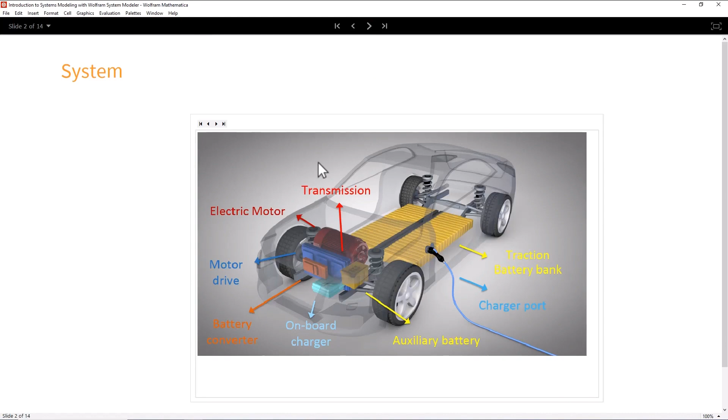Before diving into what this study group will cover, I would like to kick things off with a fundamental question. What defines a system? Please share your thoughts by participating in the poll. So we have all of the above as the winner. Robs, if you can show the results of the poll to the audience.

So the most votes goes to all of the above. Let's see what we mean by system in this study group. When we think about a system, a common example that comes to our mind is a car. Is the entire car considered a system? What about its transmission or the engine? Are those systems too? To understand this, let's define what a system is.

Here are some definitions of a system. According to NASA, a system is a combination of elements that function together to produce the capability required to meet a need. The International Council on Systems Engineering expands on this by describing a system as a construct or collection of different elements that together produce results not obtainable by the elements alone. And if you check the Cambridge Dictionary, it simplifies a system further as a set of connected things or devices that operate together.

These definitions reveal three key aspects that define a system. It is a combination of elements. Those elements interact with each other, and together they fulfill a specific need. In this study group, when we refer to a system, we will stick to these three characteristics. Let's apply this understanding and analyze some examples from our daily life.

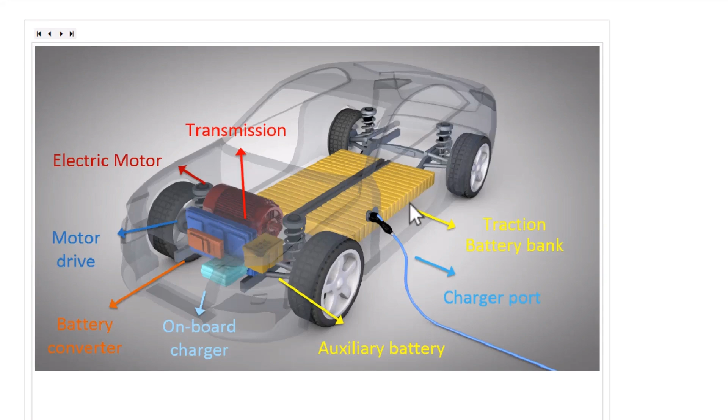But why are we interested in systems? What is its usefulness? Consider the system for your home budget. You have already identified its various elements and how they interact with each other. Now, let's say you want to buy an apartment. This decision will add a new element to your system and change the outcome of your home budget system. By creating a system, you have narrowed down the scope of your problem, and now you can easily check the impact of your decision.

But how can you check the impact? The way you can check the impact of your decision is by actually buying an apartment and checking the impact in real time. Possibly a very costly affair. What if you have to choose among 5 different apartments? Will you buy all of them? Probably not. That is where a model comes into play.

Once you have identified a system, you can abstract the system as a model, probably as a mathematical model, and play with that to check the impact of your decision. For example, buying an apartment using the home budget system. To summarize, you need to define a system to narrow the scope of your problem. You then abstract the system as a model that will help you in analyzing the impact of your decision on the system.

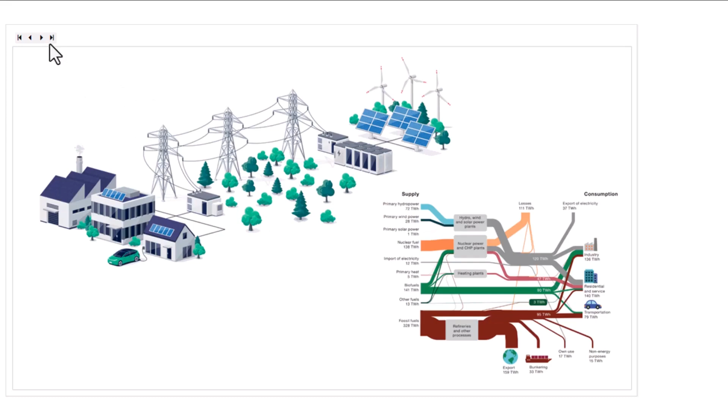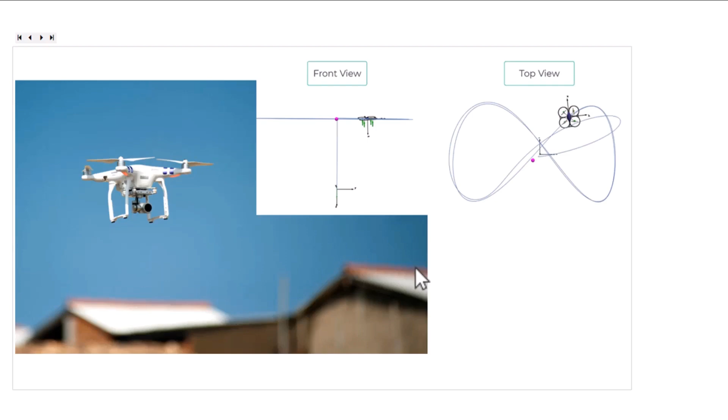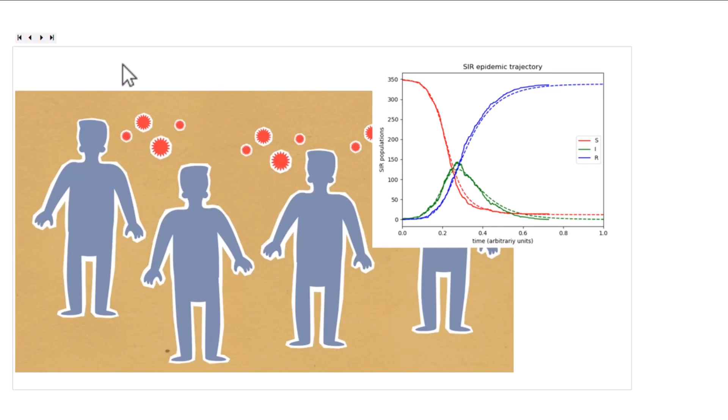So far, we have seen what a system is, some examples of systems, and why we need systems and models. Let's now look at how this study group is organized and introduce you to the course instructors.

The goal of the study group is to introduce you to thinking of real-world phenomena as systems, introduce you to the principles that will help you abstract those systems as models, and finally introduce you to workflows that will help you draw insights from your model to facilitate understanding, training, and decision making, among other things.

The entire study group is divided into two main sections. In the first section, you will become familiar with the tools. You will start with modeling with System Modeler and then analyze your models using Wolfram language. Then from Thursday, we will introduce you to the principles that help in modeling and carry out hands-on exercises.

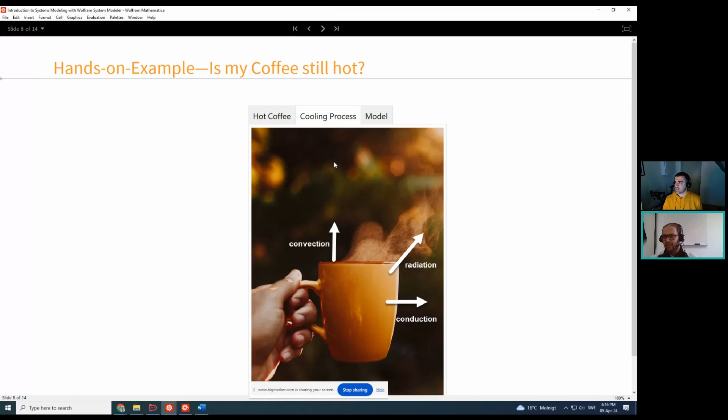In this process of cooling this coffee system, we have different components, like the coffee mug and the ambient. We will model a system that looks like this, where we have a coffee mug that interacts with the ambient, and a thermometer that is used as a sensor to measure the coffee temperature.

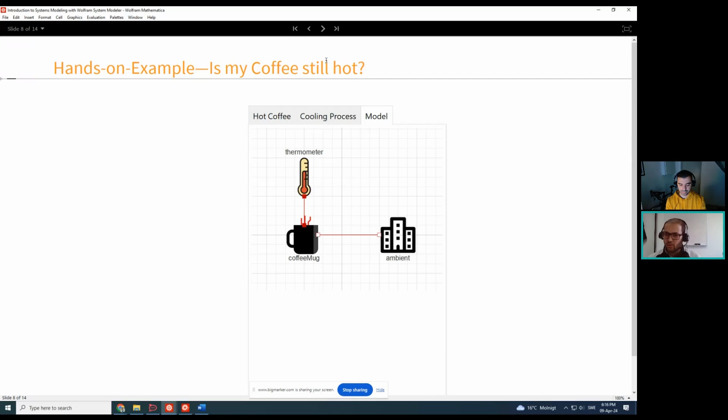Okay, so let's take a minute to open up System Modeler. Those who have already opened System Modeler can open the modeling principles.mo file that is present in the shared folder. Let me get started.

For people who are new to System Modeler, this is the modeling interface, where you have a blank white canvas where we drag and drop our components to create a model. We have different options on top, which we will cover gradually as we move along. Then you have different libraries, like the Modelica library, with pre-built components from different domains, like mechanical, thermal, or simple mathematical blocks that you can directly make use of to create your models.

But for today, we'll be using the modeling principles library that I created for this study group, and we will be using the coffee sub-package listed inside it. So the first task for this study group is to recreate this coffee cup model using the components present inside this components package.

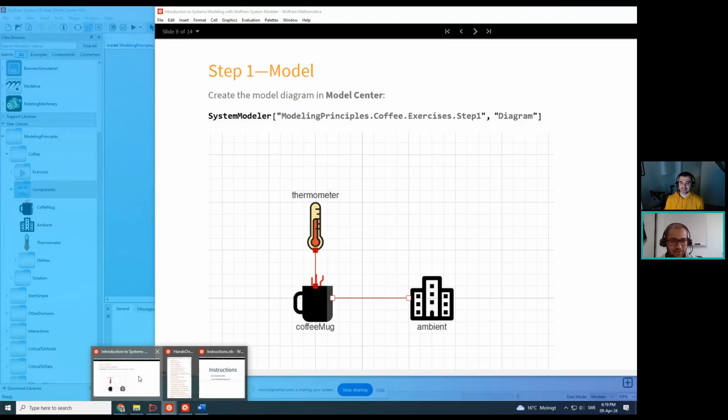Maybe you can give some hints how to start with. Just show the notebook, right? Yes, so here is the notebook. So people can just look at it and try to drag and drop the components first.

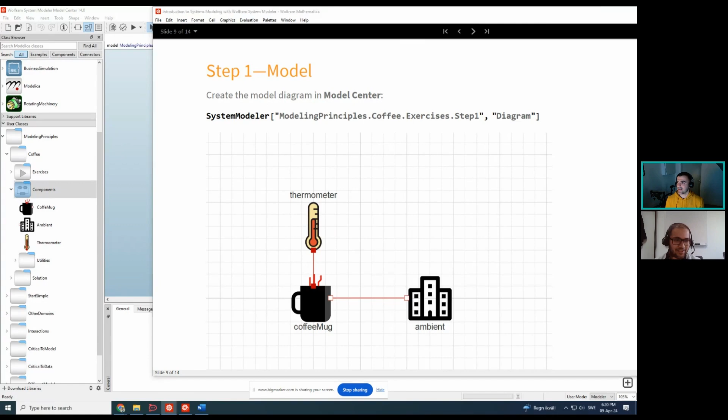We have over there in the components a red one and a white one, little squares - what are those? Such hints would be useful. Okay, so let's answer those as well. But let me start by doing the exercise myself.

Okay, so let's drag the coffee mug first. Then we will have ambient, and then we will have a thermometer here. I will just zoom in my screen so that it's visible to everyone. I think this should be fine.

So these red things are connectors. For now, just knowing that those are connectors is a good start. Those are very rich connectors - when you connect them, they take into account mass conservation laws and energy conservation laws. So they are not just input and output connectors, but they have a lot more information about the models.

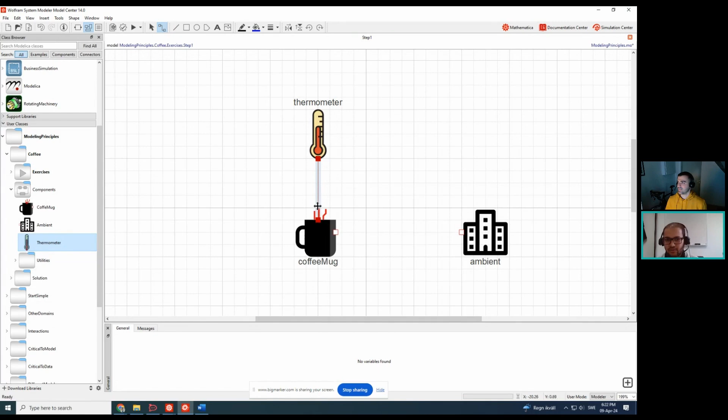That makes your modeling life much easier by taking those conservation equations into account. So now once we have all the components in place, the next task is to connect them. To connect all these components, we have a connection tool icon besides the arrow on the right-hand side. We'll click that, and now our connection line tool is activated. Now we will go to the port which expands and drag and connect it with the coffee mug, and similarly connect the coffee mug port with the ambient.

We'll give a few seconds for people to do this. The idea of this session is not to go into the thermal aspects of the different components, but for you to get yourself used to System Modeler - making yourself comfortable with how to drag in components, how to connect, and then how to simulate and process the results. Vedat, do you have anything to add to that?

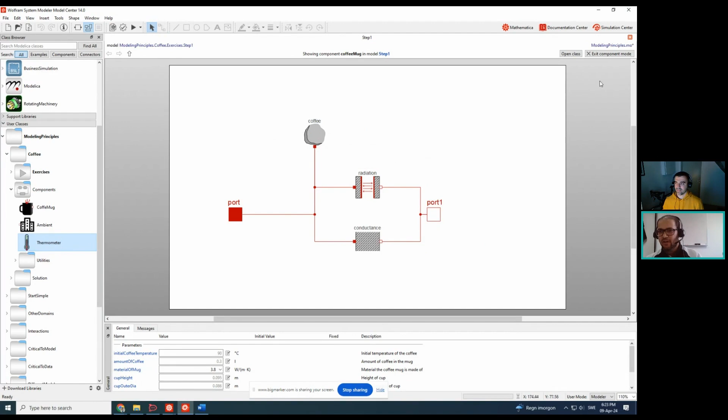So if I double click on this model, you can go deeper into how this model is built. For this model, we are just considering conduction and radiation components, and then we have a coffee storage element in it. So we are not considering the evaporative losses for now - that's not the objective for this model. But it is doable, of course. For this example, I just wanted to start with the extremely easy way of modeling these things.

Okay, so now I think people would have completed this task so far. And if someone is really interested, they can click on each of these components, and you could see that each component has a bunch of parameters that you can already set. We have provided default settings for all these parameters, and one can play around with different initial temperatures.

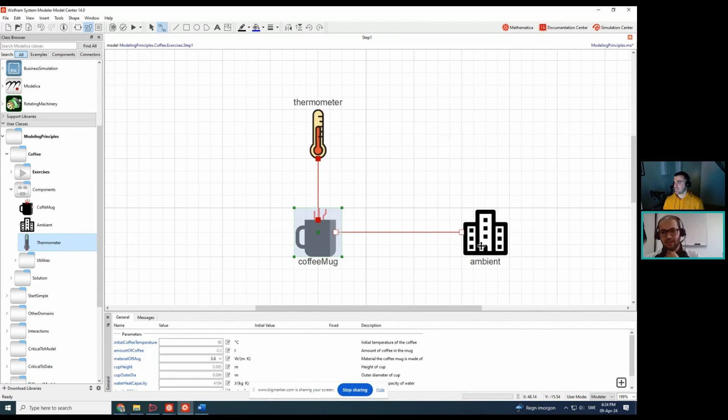And different amounts, different diameters, and all those things. Each of this, the ambient is a boring one, it only has a fixed temperature in it, but the coffee mug is the interesting model. So far we have dragged in our components, connected them together, and I showed you that you could change the parameters by clicking the components and choosing a value based on what you want to model.

And the thing is, once you start typing here, you can actually switch between different units here as well. So for instance, if I am not comfortable with the SI units, I can choose Fahrenheit as well. And then System Modeler would automatically convert to the right unit.

Okay, but so with that, what now? We have the components in place, we have connected them together. What is the next step before we start simulating it?

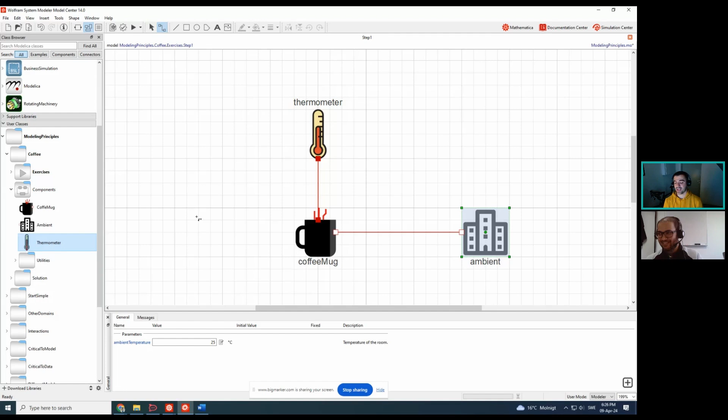When we just get started, you ask what is the system, right? So can we now explain that question? For instance, in that, I can say that if the coffee mug is the system itself, or should we include all of them?

I think for this cooling of the coffee process, we have the three things together. For me, I would consider it a system, because the coffee mug is interacting with the ambient, and we have a sensor to get an output from it. The objective of the system is to understand the cooling process of the coffee present inside it.

So I would refer to a system as the entire thing with its elements, and we simulate it because it has a purpose of understanding how the model would behave, right? All the dynamics and interactions between these components as a whole is the system.

Okay, so the next step is, once you have the model in place, once you have connected it, the next thing is you would want to set up the simulation, the experiment setup. For example, how long should the simulation be run? So you need to specify those details for your model, and you can do that by clicking this small arrow icon beside the play button and clicking the experiment setup.

Here you can set how long the simulation should run. For our case, I will choose a time unit, let's say minutes, and then I will start by choosing a stop time of 30 minutes. I will give a few seconds, like half a minute, for people to open up the experiment setup and fill in these values, or any value of their liking.

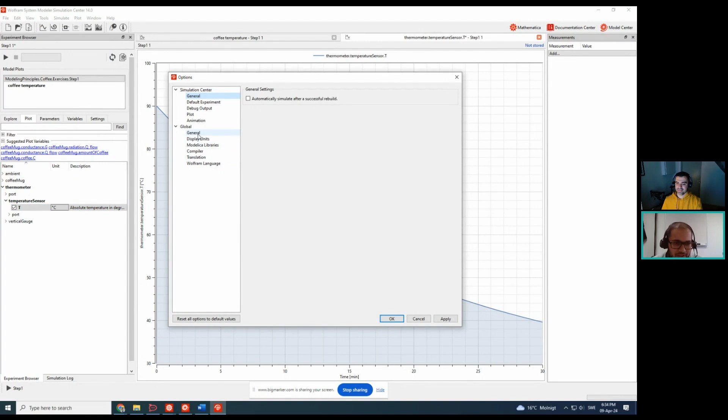We have a question about the blue filling. I have a global setting for it. Let me get back to the default setting first - go to general within the global options. I think most of you would have gotten a plot like this without filling.

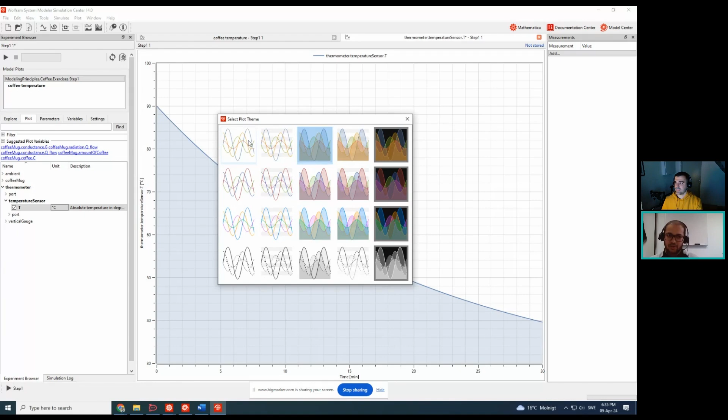If you want some filling in the plot, I find it useful, because if there's a zero crossing, it helps me easily identify it. And if I plot multiple plots, it helps segregate them. I've set this plot theme in the global properties so I don't need to define it every time, but you can play around with different themes and switch between the available ones to see which suits your model.

Okay, so now once we have the model, simulated it, and plotted the results, the next thing we should do - let me see what I wrote - once you have the simulation, we started with a random simulation time of 30 minutes, and in most cases that time is not what we want.

It's just the first guess value that we have to give, because we don't know the dynamics yet. In this case, if you want to simulate for longer, you can go to the settings, and in the stop time field you can simulate for a longer duration.

For instance, I have selected 60 in this case, and then press the simulate button here. And when you do this, you see that my temperature and time duration have changed. So once you have the plot, this is the first thing that I typically do.

The next thing you would do once you have the plot is test different scenarios. Like, what would happen if my ambient temperature is something else? Or what would happen if my initial temperature is something else? How would you test those scenarios? Should you go back to the model, change them, and simulate again? Of course, you can do that.

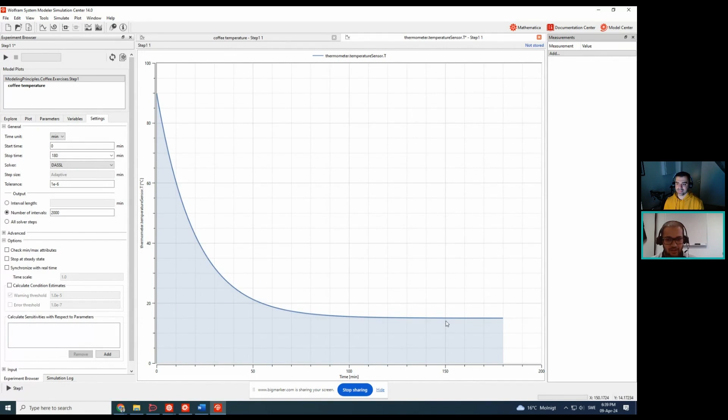Ankit, maybe we can also increase the time and show what is the steady state temperature of the coffee mug, how cold our coffee mug can get. Yeah, I think so. Let me simulate for a longer time, 180 minutes, and then you can see that I'm getting to 15 degrees.

So the steady state temperature is of course the ambient temperature, and I can get the value either by hovering over the variable, or by pressing control and clicking on the time axis, so I can get a measurement at that point in my measurement window. Here you can see the temperature after 150 minutes is 15 degrees centigrade in this case. So if you want different snapshots of time, you can control-click on the x-axis and plot those variables.

For some reason, Vedat, my coffee temperature is not changing, but I think we can look into it later on. Okay, I will have a look at it later.

Getting back to the model, so once we have the plot, we can change the parameters. We can change the initial value of the different variables, and we can change the experiment setup like the stop time and so on.

So now the next thing, Vedat, what should be the next thing? Now once we have the model, we know how to test different design scenarios. What should we do next? What will be interesting now? Good question. But I think before we discuss what we should do next, we should try to store our plot in the model.

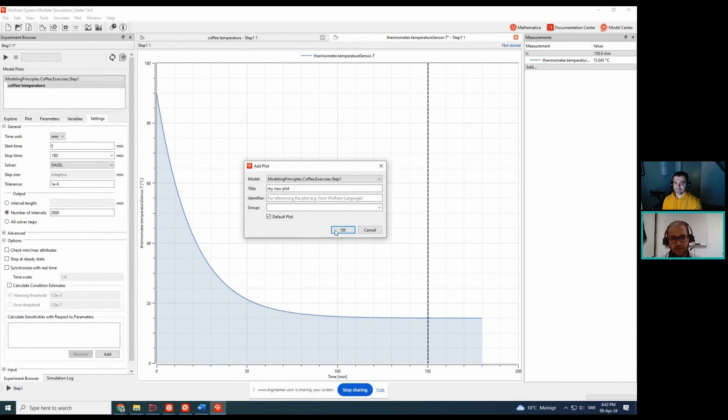And when I click that, I can give it a title, 'my new plot', and make it a default plot, then click OK. When I do that, my new plot is added to the model plots.

I think you click default plot yes, there. So yes, what was the reason for that?

Let me delete my previous plot here, just to repeat the step. You click on the 'not stored' text, and then click on 'add plot to model'. When you get the add plot to model dialog, you give it a new title, and then you can choose either to be a default plot or just list the plot here as a not-default plot.

The default plot is, let's say, when you simulate a model, which plot should be shown at the start. If you have five different plots stored in the model, all five should not be shown - it will be very confusing. So you can select which plot to show first, and then have auxiliary plots which are not the primary plot you want to see, but those plots help you in your analysis.

So once you have a model, simulated it, plotted it, we have now stored the plot. I think I should give a few seconds, or a minute or two, so people can try playing around with saving a plot, because I think saving a plot is quite often missed in the modeling process. But anyways, let's ask Sergio.

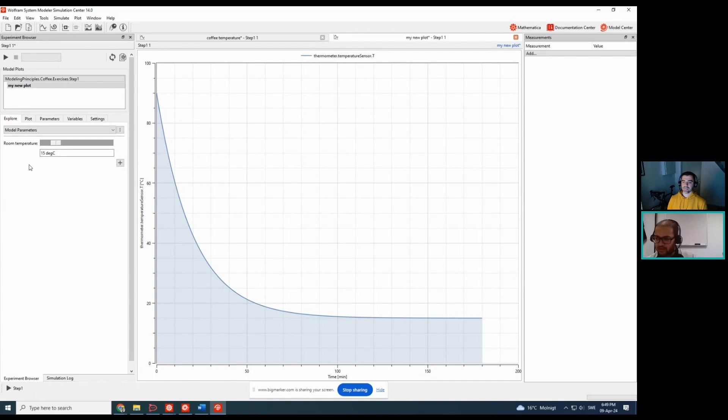Yes, Ankit, can you tell us how we can get there? So we go to the Explore tab first. And in the Explore tab, either it says create a new panel, and you click that option. For now I have a panel, that's why I'm getting this plus option here. If you start with a blank, you would have got a message saying you can create a panel by clicking somewhere in the first tab. Or if you already have this panel done, then you can add a control object by clicking the plus button here and then selecting control object.

If we don't see the Explore tab, then we can say that that version doesn't have it. I think that would be the right analysis.

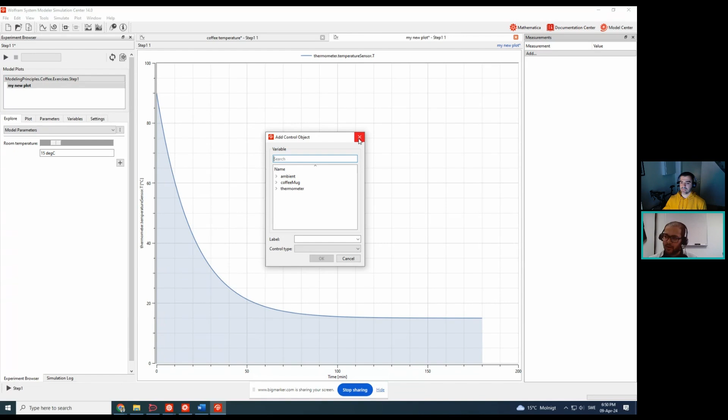I think for this study group, people can try with the new version of System Modeler, version 14, because that has a lot of new functionalities that we might cover in the study group, like dealing with units and other things. I created this model taking into account version 14. So that is my expectation, and some people might find it a bit different if they're using an older version. But yeah, this is version 14 that I'm using.

So far we have seen how to plot, we can store the plot, and then we can change the parameters, variables, or settings, and then we can add a slider to one of the parameters and quickly iterate through various designs.

Okay, now let me get back to model center. There are a lot of things that I want to cover here as well, but I will not go any further because we have 8 more sessions coming up. So if you don't understand something, it's very normal to feel overwhelmed at some stage. Just try to give yourself some time, and once we are done with the 9 sessions, I think one would really be comfortable using this.

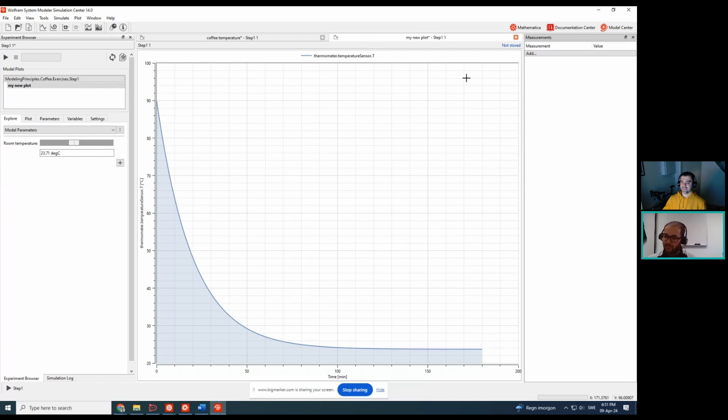We had a question here from the audience, and they were asking what is the difference between this red one and the white little squares, the connector squares.

For this model, nothing. For the thermal models, nothing. It's just different ways of visualizing it. But it doesn't matter. Here I'm connecting a red with a red, and here I'm connecting a white with a white. That doesn't mean that I can't connect this white with this red. For the thermal domain, it's just for visual representation, because sometimes you have elements with a notion of coming in, coming out, so it helps when you have a component with in and out to visualize it properly.

But since the connectors are based on equations, and those equations actually determine whether something is going in or going out, we use concepts similar to Kirchhoff's current law and Kirchhoff's voltage law to determine how the connectors are connected. So at least in this example, in the thermal domain, they don't have any difference. It will not differ.

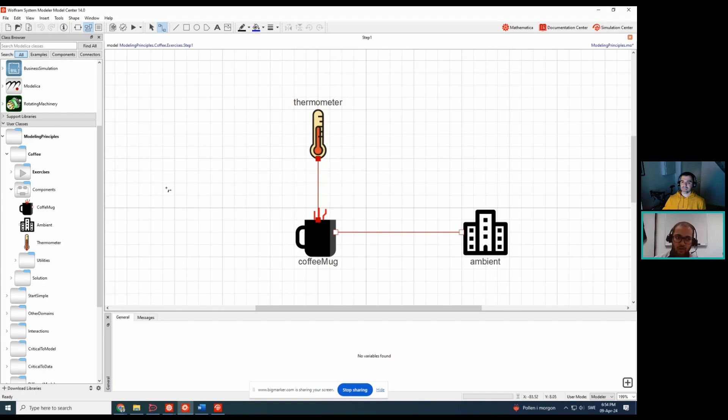Now let's add documentation to our this exercise. To add documentation, you simply right click on the model and go to view class documentation. So right click and view class documentation, and this will create the documentation of the model. I will give a couple of seconds for people to at least get to this stage. So you right click on the model, click view class documentation, and you will get this view.

In this view you can see that System Modeler automatically pre-populates your documentation with some data. Like, it lists the name of your model. In this case I didn't have a description, so it's blank, but it also shows the diagram of your model and then the different components that are used in the model. So we do try to automatically populate some of your documentation.

But now let's say you want to add the objective of your model, and how can you edit it? To edit this document, you click on this small arrow here, besides the pen option here. I will pause here for a couple of seconds so people can actually see it. You click on this small icon on the top bar, and then you will be provided with different options like edit information in what-you-see-is-what-you-get editor, or edit information in HTML.

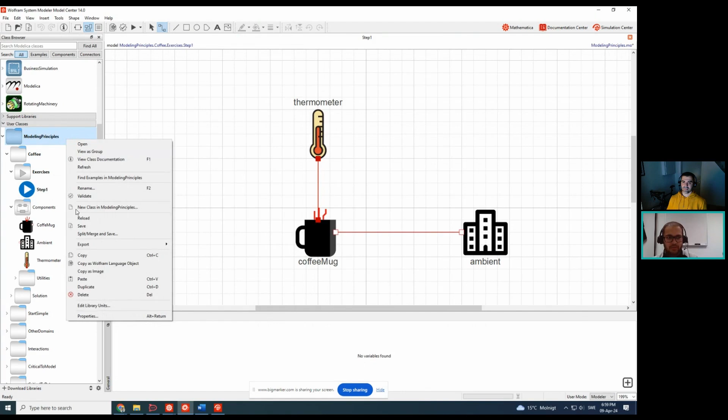So you can list all the assumptions, and then click back on the same icon, and you'll see that in the information your text is updated. We'll give a few seconds for people to try it and get used to the documentation. Once you're done, you can close and save your model. Next time you open it, you have the model plots, the control panels, and the documentation stored in the model.

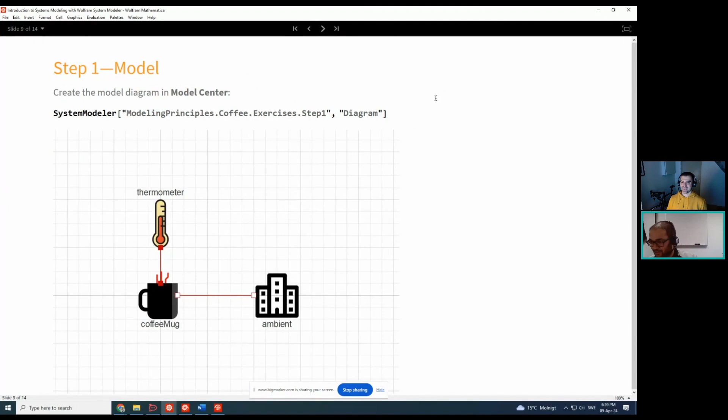Let me interrupt you there because that is related to a question we got: how does System Modeler know that we have a exponential temperature decay? We showed something like a first order degradation decay, so how do we get that dynamic? I guess it would be nice to give an overview of how those pre-built components are written, because right now it's like a magic box, we just drag and drop things and show the magic.

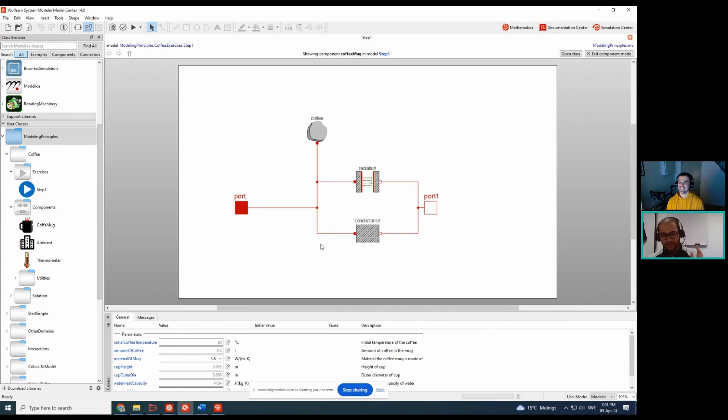But if someone is really curious and cannot control their urge, they can double click on the coffee mug, double click on the conductance, and open the class. Here on the top bar you have the text view, and in the text view you can actually read through all the equations. The thing is, this code you are seeing is not Wolfram specific code. This code is called the Modelica language, which is a different tangent I don't want to go into now.

But for people who are really curious and can't wait, all these models that we have created are made using the Modelica language, which is an open standard language for modeling these kinds of complex physical systems. These equations are simple equations that we are used to -- this equal sign is not an assignment operator, it's just an equation. So people who really want to understand how these components are built can go to the text view and look into the equations. Also, if you're eager about Modelica, you can search for it and know more.

Along the coming 8 days we will also show you eventually what this code looks like, and if you want to do more complicated models, how you can do that. But we will go slowly. So we cover all the dynamics related to that domain in those components already -- that is why we are seeing that result.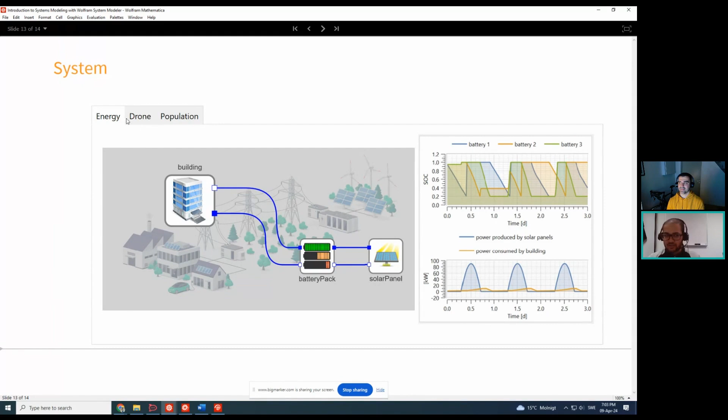Okay, anyways, let me finish it first. So you can make energy models and try to understand or test your logic, like if the battery is sufficient to power a building, for instance. Or you can use a drone model, a very comprehensive drone model, and try to understand the effect of wind -- is the controller sufficient, let's say to hover a drone at a particular height, is the controller sufficient to maintain the position at that level, or is it not sufficient?

So those kind of control related questions you can answer by creating more realistic models. And also of course you can create an animation using System Modeler. That feature I have not shown today, but there are some components where you can add animation to your models. So rather than just plots, you can visualize the multi-body objects in the animation view.

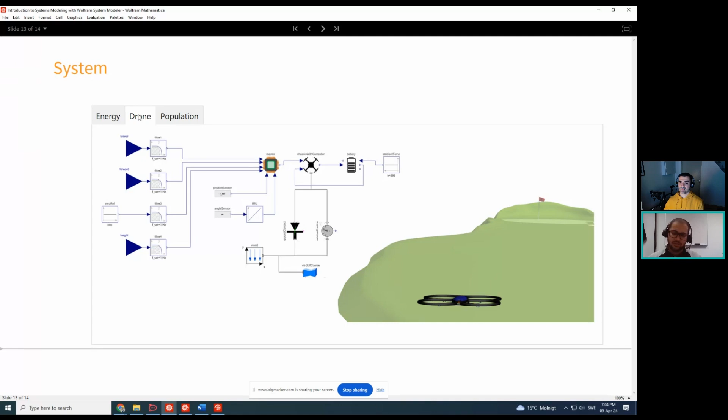Finally, this is a topic which we will cover on Thursday. We will be modeling a simple spread of an infectious disease, and using that you will learn how to create uncertainty plots, like if some parameters are uncertain, how the model would behave for those kind of uncertainties. So you can do much more complex models with system modeler. In the coming eight sessions we will go into more detail and try to cover different types of examples.

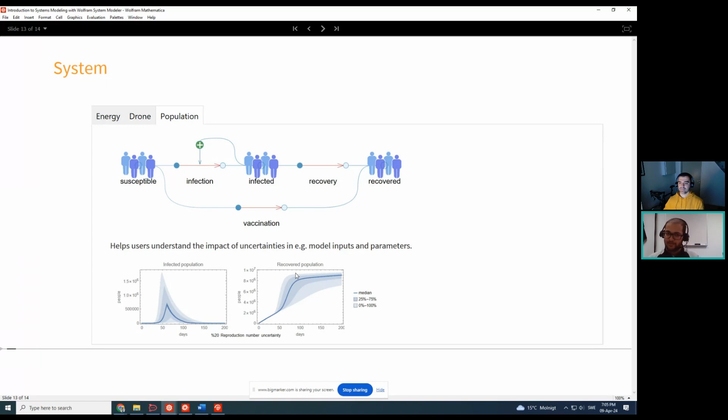Okay, Vedat. Now I have covered what I thought I should cover, and if there are any questions, please shoot at me. I guess we don't have any question left.

Maybe you can also quickly show us how did you come up with those nice figures. That is also part of the model, right? Yes, yes, yes, yes. Okay, nice picture. So that's proprietary information. No, no.

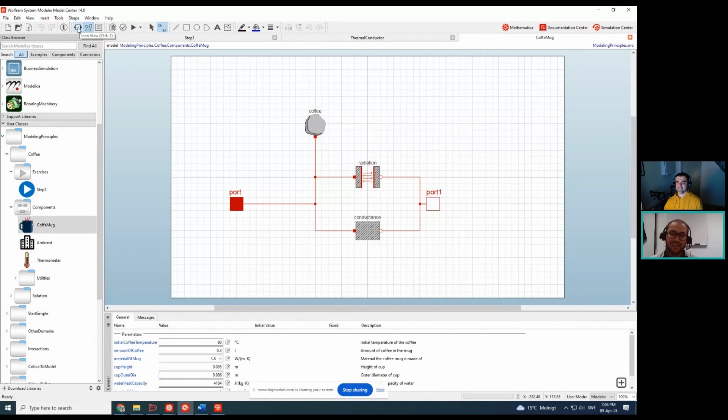So once you create a model, create a component, and this is something we will cover later on, but I'm just trying to cover it now. Once you create a model, you can give it an icon of your choice. On the top, we have this model view. On the right hand side, you have the text view. On the left hand side, you have the icon view. Unfortunately, I cannot zoom in into this part, but you have the icon view here. When you click it, you can see the icon with the grid on.

Let me just remove the grid. View, show grid. In this icon view, I have attached an SVG. I got an SVG from open source, or you can create your own SVGs or PNGs, and then you can have your image in the icon. In this case, I just used an SVG, or you can use different drawing tools. You have rectangle, ellipse, polygon, or text, and then you can create your own icon.

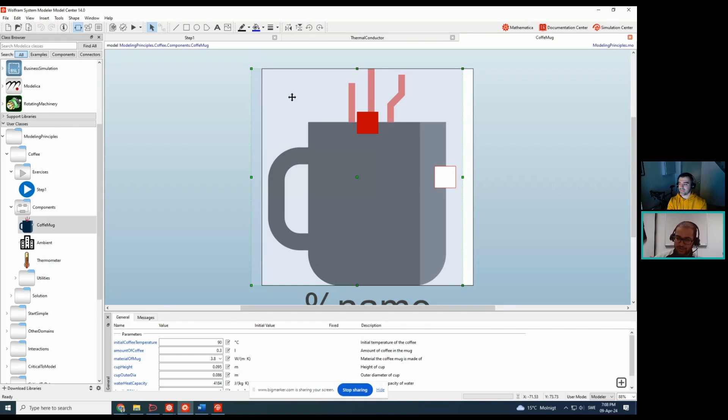Some of our users are very strict with icons. They have their own logo in the icons, as well as color. The color coding is also based on their company and all. We will try to cover this later on. Of course, if you want to give more life to your components, you can add icons to it. But so far we have not covered components, so people who are new to system modeler, please don't get confused, this is something advanced. As you start using system modeler, we will introduce you to the concept of components in one of the sessions. But for now, just know that this is possible.

Okay, Vedat, is there any more questions that we should answer? I guess we are done. Pretty much those were all the questions. I don't know, Sergio. Yeah, there is a question, have we missed anything?

What is a system? Is all of the above correct? I think all of the above is correct. Like in the first we had, what is a system, right? It's a collection of elements that interact with each other, and their objective is to meet a demand or meet a need. So I think what people say is right. All of the above is the right answer for that.

Okay then, so if we have no other questions for today, then I think we are done. Sergio or Vedat, do you guys want to add anything? No, I guess pretty much done.

We're seeing also a lot of interest on how you can export the simulation results, but I guess we will cover that also in different sessions. I think those are really good questions, and we will try to cover or answer them in the upcoming sessions. If you have any questions, as Cassidy said at the start, please try to post it in the community chat, and we will try to respond whenever we have time.